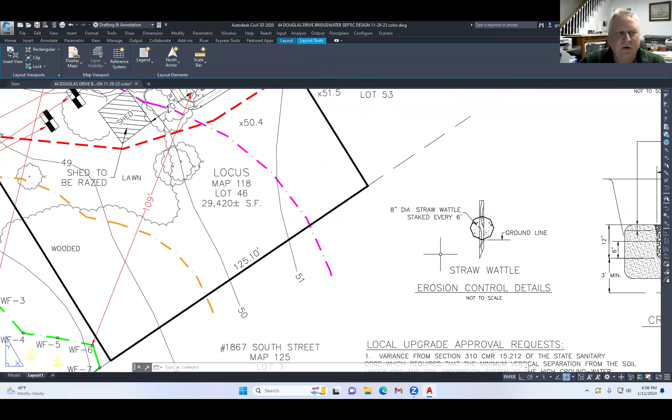We're proposing to replace the septic system. I'll zoom up so you can see the existing system—it's right where we're proposing the new system. This new system will be completely outside the 100-foot buffer.

The only work that will be done inside the 100-foot buffer will be to replant and reseed some of these test pits that were unsuitable, removing the shed, and for maneuverability to probably take dirt out.

We have 2 accesses to the site—one on the east side and one on the west side. This allows us to bring in material on one side, stockpile it just on the 100-foot buffer, and remove material on the left side. Of course, some of the access will be inside the 100-foot buffer. We do propose dewatering pits here for any dewatering that would be necessary.

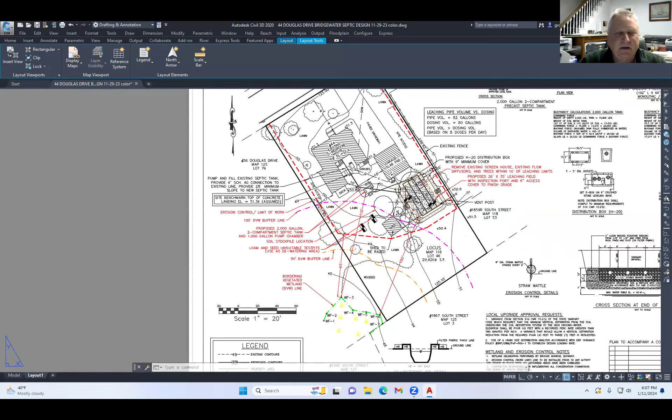The system, once again, is completely outside the 100-foot buffer. There is a screened-in porch right here that's outside the buffer that will be part of the work—we're going to remove that screened-in porch. So 2 buildings will be removed: 1 screened-in porch and 1 shed right here.

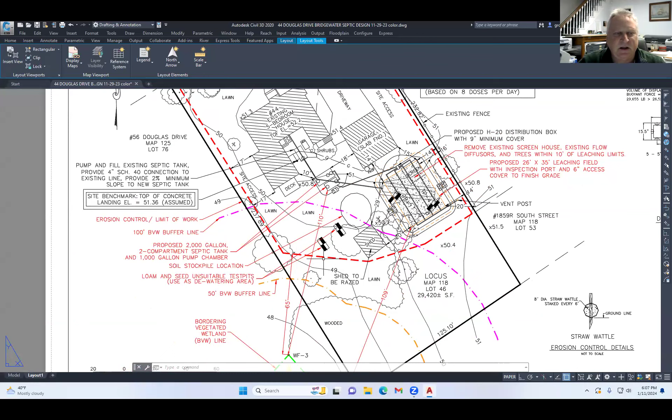Basically, the erosion control line or siltation fence will be 65 feet to the wetland. The septic system will be 109 feet from the wetland. I guess there was a question about offset to the property line—we do have 14 feet, and 310 CMR allows us to be 10 feet. This has been approved by the Board of Health.

David, I'm sure some of the members might have questions, but the abutter at 56 Douglas Drive provided the commission with some photos today. There's concern that if this is an elevated system, they're already getting drainage from this property onto their property. Can you address that?

Yeah, sure. You can see from the grades here, we have a 51 here, and a 51 here. It's very, very flat here—there's really no place for water to go. Our system will be just slightly elevated at 52. This would actually push water mostly towards the left. There will be some runoff here, but it won't be stagnant. It won't be flat anymore.

It's a very flat area here. We'll have water pushing off to the right. Actually, we'll have more water pushing off to the left now, towards the wetland, because there will be a 2% slope cutting through the system that pushes water from the north side to the south side and then out. All I can say is that area is very, very flat and tends to gather stormwater in any event. By raising the system, we'll actually be pushing the water away somewhat.

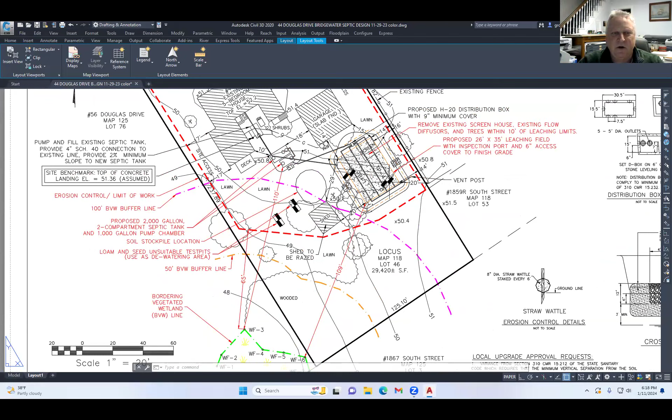By raising the site here, we're going to intercept any water going into this low area and forcing it into the wetland. And what I was saying is maybe we could take this 50 and within the limit of work, we can do a swale here so that we can maybe alleviate some of the water that ponds in this area. Because here's 50, here's 49. We might be able to alleviate that water by just a simple swale.

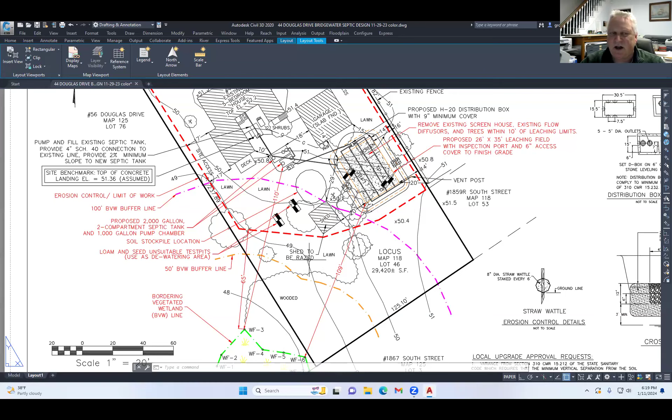Could you explain what a swale is, please? It's just a narrow trench with a slope away from the ponding area towards the wetland. It's mowable, with 3-to-1 slopes, and it will give a place for the water to go and run, instead of being stuck there.

So you feel comfortable with the water draining towards the wetlands? You don't think that the water on the east side is going to drain back into our yard? I feel that this would be a solution that would help. So it would help, but I don't think it's going to fix the problem.

I don't mean to interrupt. If the problem has been happening for years, I don't think a septic system has to be replaced. It sounds like he's trying to make some kind of adjustment so that it won't sit ponding or back up because of the raised elevation of the septic system. So if he's able to do this, yes, the water can go towards the wetland because it's wetland and it could use it, so it's okay with it. But at least it's not going to stop the water from still happening in your yard and his yard—it will have a place to run instead of being stagnant.

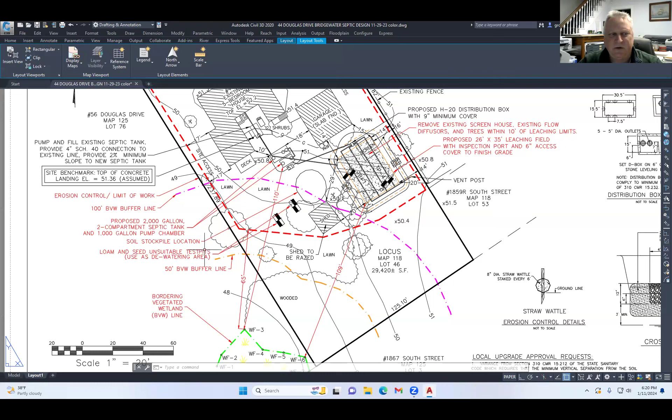So is this the only place on the property? Could they put the septic system on the other side of the shed? Unfortunately, we found some very unsuitable material here. We were thinking about that. The soils were unsuitable for a septic system design. So we found the suitable material only in this area on the lot, unfortunately. And that's right where the existing system is. That's probably why they put the existing system right where it was. I see.

Wendy, if I can add to your comment. Sure, Marilyn. So I think David has a great idea—you know, Marilyn, the applicant, and David, I'm also a Marilyn and David, and yes, we live together too, for the record.

But a trench works really well diverting water away from an area for stormwater control. Somebody's property can't drain totally onto you, but that's not the full case here. So I think the applicant's idea of doing a trench will help that water area tremendously. And unfortunately, like he just said, if your soils don't perk well to absorb septic tank waste, they can't put it in that area, and you don't want to see a septic tank overflow either. That's not good. So I think that's a good idea, and it would definitely move some of the storm water. Will it take every inch of it? No, but it will definitely divert it.

Well, thank you, Marilyn. Our intent by bringing this up was just to have this be a consideration. I'm happy to see that we've come up with a potential help. It's not going to alleviate the water—they don't call it Bridgewater for nothing. I appreciate the owners and the engineering firm for coming up with, hopefully, a solution, or at least something that will help. That was our intent, just to point out that we do have this issue going on now, and now is the time to do something about it. And if a trench will work, that's great.

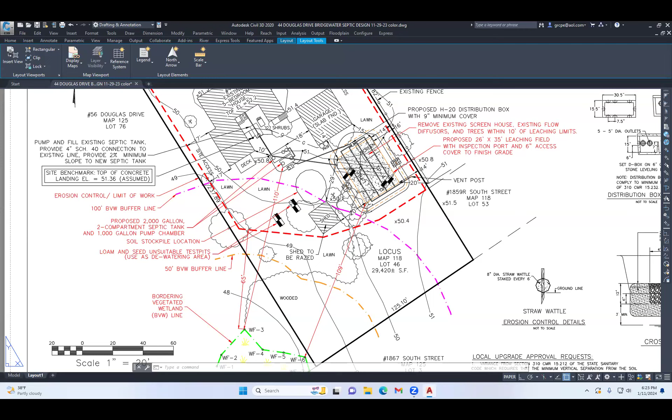Thank you. Thank you both for your concern. And thank you, Mr. Hart, for bringing that up. It sounds like a great idea. Yes, thank you very much for allowing us to voice our concerns. We appreciate the letter that you sent to the abutters. You're welcome.

All right, with that, we don't have any more hands. Okay, so do we have enough information that we can close the hearing? We need a motion to close the public hearing for 44 Douglas Drive.

It sounds like Eileen made the motion. I'll second. Thank you. And then do we have... you have to ask if there's any discussion.

I mean, we have 21 days. Our thoughts, guys, on if we want to see that plan with the trench in it. I believe the trench is going to help with the water issue. Do we vote on it now? I want to see those plans. Bob, what's your thought on that? Maybe. I think you can vote on it.

We're supposed to get more rain again this weekend. I think the drainage problem is a larger neighborhood problem than this. This just happens to be the catch basin, if you would, for the rest of the stormwater in that neighborhood. I think the best we can do at this point is David has said they'll put the swale in, and if the abutter feels they need to come back and raise this, we can just put that in administrative notes, the upgrade of the plan.

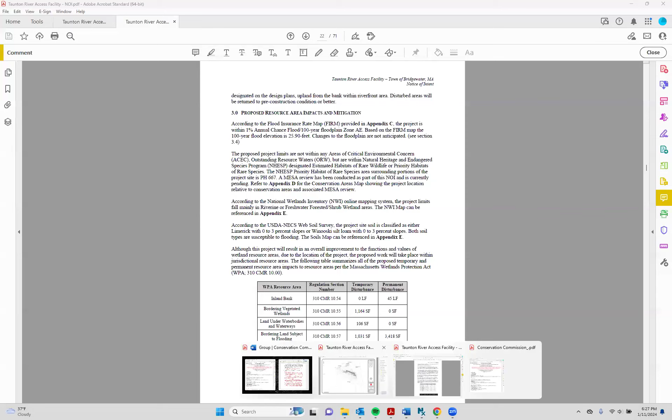Okay, good. So I can basically screen share and start talking about the project. Okay, can everybody see this? Yes. So basically, this project is taking place at a previously disturbed parking lot across the street along Summer Street.

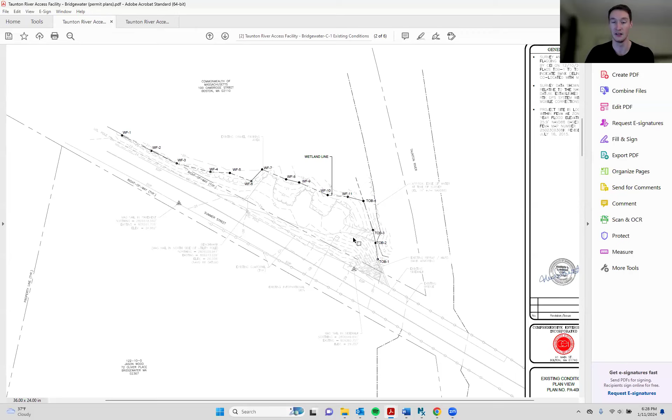Kind of diagonally across from 2045 Summer Street. So basically what's out there now is an existing gravel lot. Let me go to the existing condition sheet. There's an existing gravel parking lot with 3 spaces, and an existing access path heading down to the water. But the slope of the access path is pretty steep and is eroding away during rain events. So one of the purposes of this project was to revegetate this and get a new access path in there that's also ADA compliant, eliminating some of the erosion.

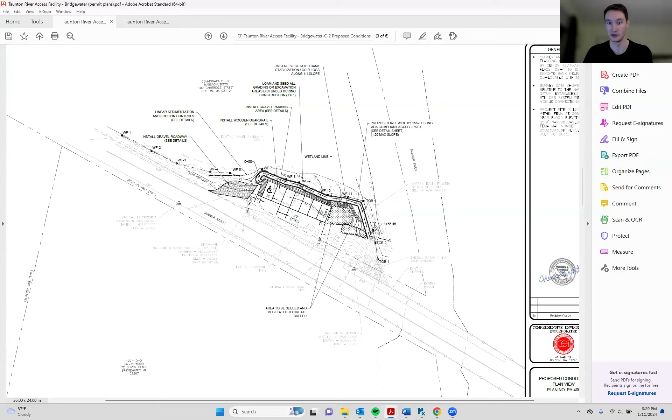So that's basically what we did here: we widened the access road coming in and made it a crushed stone gravel roadway, added some additional parking, added a handicap space, and then added in this pervious crushed stone ADA compliant path heading down towards the water. The purpose of this project is to allow people to launch canoes and kayaks and do recreational activities like fishing down by the water. Then I can go over the impacts.

So right here we have, in these orange colors, a 25-foot no disturb zone. There's a 100-foot buffer because we do have some bordering vegetated wetlands.

Flag numbers 1 through 11 up to this point, and then we do have 4 flags of top of bank for the Taunton River. And then we also have delineated the 200-foot riverfront buffer.

As far as impacts go, we have roughly 1,100 square feet of temporary bordering vegetated wetland impacts that just deals with minor grading and laying out the erosion controls surrounding the project site. We have some very minor land underwater impacts just by nature of extending the path down a little bit into where below the top of bank line.

And then most of our impacts are coming from bordering land subject to flooding, which is about 1,000 square feet temporary and about 3,400 square feet permanent, because we are converting some existing woodland areas right where my cursor is here and over here for additional parking spaces.

And you guys are good with DEP now? I know they've gone back and forth with comments. Yes, I did see the comments that they came up with, and it's basically just a matter of us talking through them. It's not anything that we actually need to do a design change on.

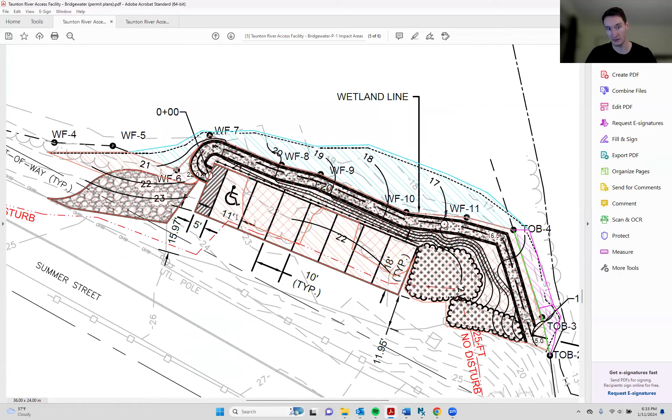And is there enough room for turnaround with the cars to back up without backing into anything? Yeah, we didn't really extend too much - if I zoom in, the existing parking spots end right where my cursor is, so we didn't really extend too much past them.

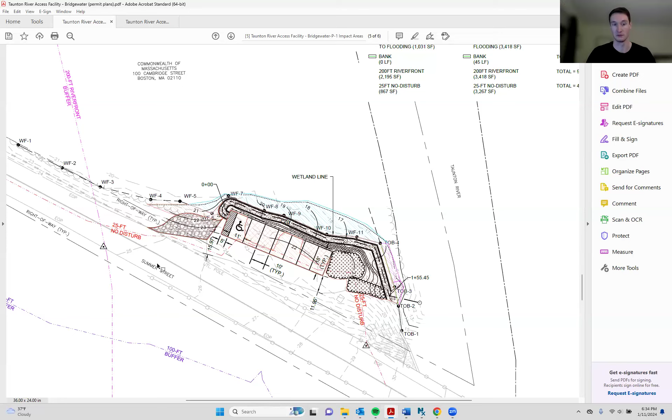And then, like I said, we're also widening the entrance way coming in - adding this right here, which is all previously disturbed grass or roadway shoulder. So we just widened that out, adding pervious crushed stone, so cars can easily get in and out.